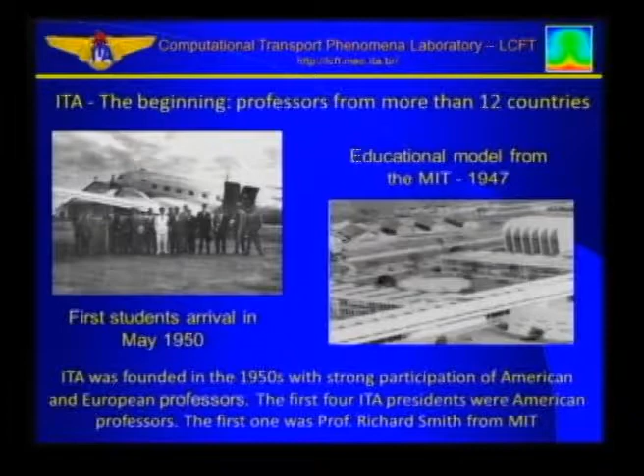So those are our first principals or rectors, if you will. And the first one was Professor Smith. Professor Smith at that time was the head of the aerostructural department at MIT. And the fifth one, this fellow, Johannes Meyer, if I'm not wrong, he was of Dutch origin. He immigrated to the US after the First War. And Professor Cecchini was the first Brazilian to become a rector of ITA, and he was actually born in France. So he's 90, and he was awarded an emeritus professorship status just a couple of weeks back. So this is our history.

And so ITA provided the conditions for establishing Embraer late in the 60s. Embraer is the Brazilian aircraft company. And over the last 30 years or so, Embraer has become the third largest commercial aircraft manufacturer. We're talking about mid-size aircraft, 100-seat class. So the other manufacturers are Boeing, Airbus, and Bombardier. Actually surpassed Bombardier. We are the third now. So our biggest competitors are the Canadians, actually. We don't compete with Boeing or Airbus.

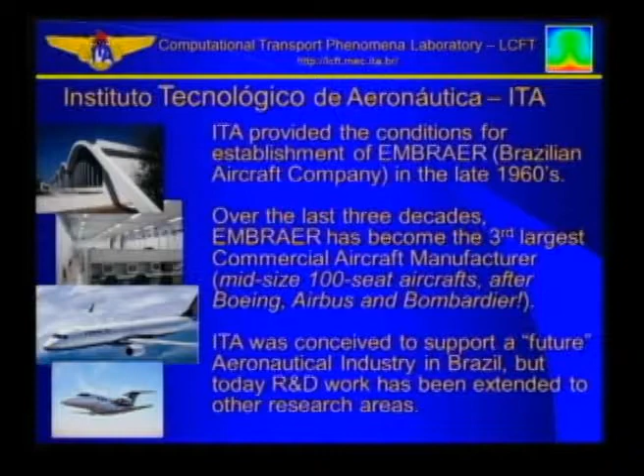And this is actually our new lab. I have a folder at the entrance there. So this was a gift of our beloved Petrobras. Gave us a new building, and the building is nearly ready. We have a 65-seat auditorium, and I would like to make that available to the Brazilian chapter. So we can have maybe in the future. The building is not ready yet, but we are almost there. So whenever you folks are in São Paulo, we'll be delighted to have you visit.

So the lab, what's called the Computational Transport Phenomena Lab, this is linked to the Department of Energy. I'm now serving as the head of the Department of Energy. So we started activities in 95, we became official in 99, and our mission statement is to support computational activities needed for R&D projects involving numerical solution of heat and mass transfer. So this is our mission statement.

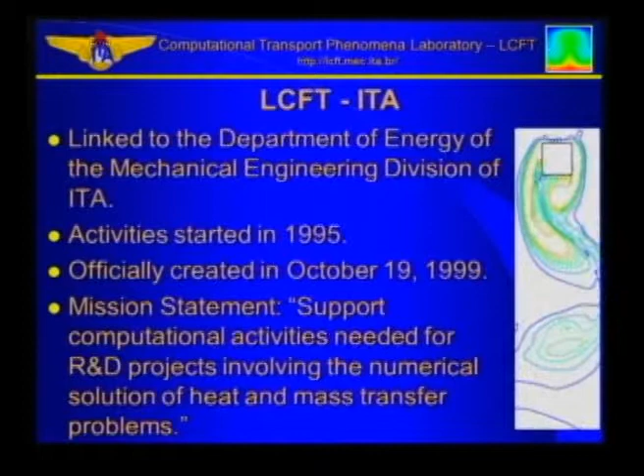So, talking about mathematical modeling of flow and heat transfer in porous media, we're going to talk a little bit about the applications for that, modeling, the microscopic computation, macroscopic computation, model, and some results. Hybrid systems: we're talking about a finite porous medium, something that ends, and then there is a clear flow, right?

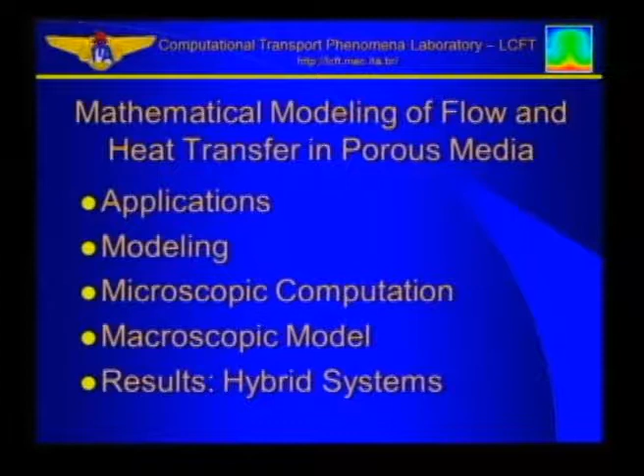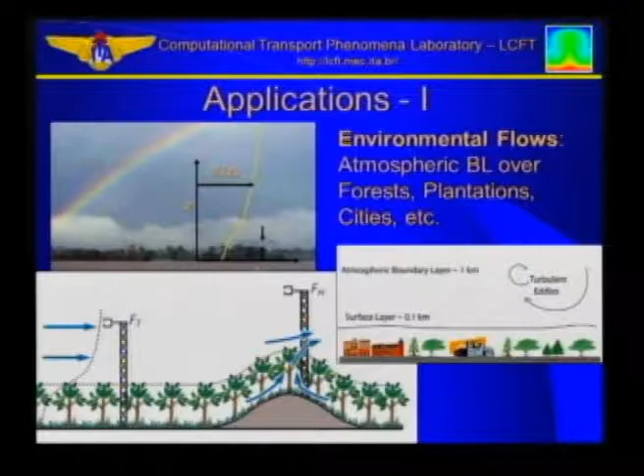So, environmental flows. The kind of porous media that we're talking about is not actually flow in rocks or sand or something like that. This is the Amazon River and the Amazon jungle right there. You see we can have an atmospheric boundary layer, and through the forest we can have what we call a permeable structure. So flow through vegetation and trees, and flow over populated areas where you have buildings, trees, whatever. Mathematically speaking, if you look from far from the site, that can be seen as a permeable structure.

As far as engineering applications, engineering flow is of some concern. So we have a gasifier here. In a gasifier, usually you have pellets of something, or coal. In our case, in Brazil, biomass, for example. So you have gas going in one direction and the pellets coming in the other direction.

And here's a reactor for producing hydrogen-rich gases, if you will. If you have a rich mixture coming in, you can have a partial oxidation followed by a thermal reformation. So you get a hydrogen-rich stream, and this is a porous structure. So this is a way of producing hydrogen. And this is a porous combustor that has been used for household heating, actually. So we're going to be talking a little bit about applications on those particular equipment.

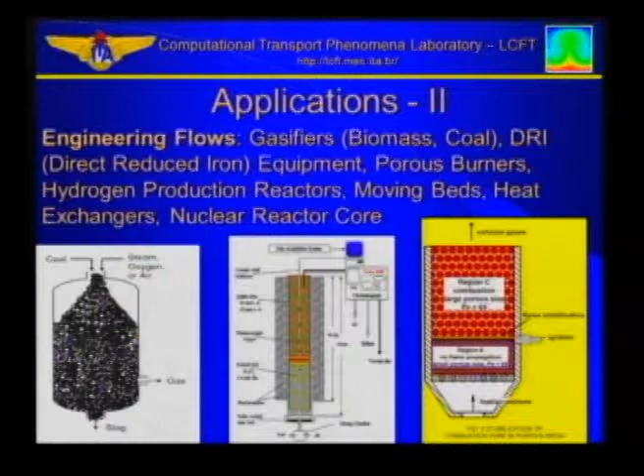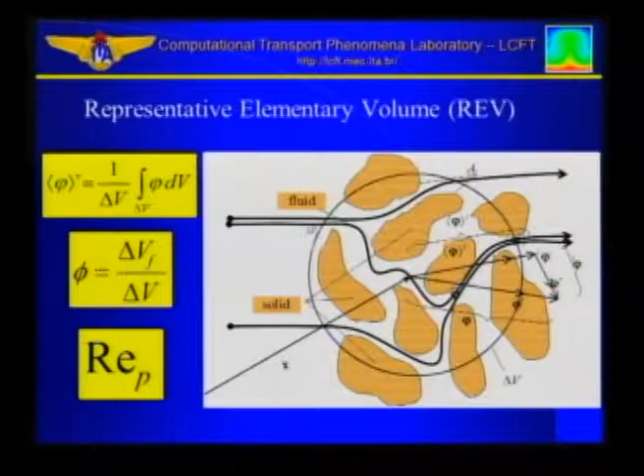So when we talk about flow in porous media, we have a solid phase distributed somehow, and in between these solid particles we have void space. So we can have volume averages that are defined like this, and the porosity, which is defined as the ratio of the void space to the total volume. So the very first thing is to establish some volume over which we're going to make an average. And we can also have a characteristic number, which is the Reynolds number, based on the statistical value of the pore.

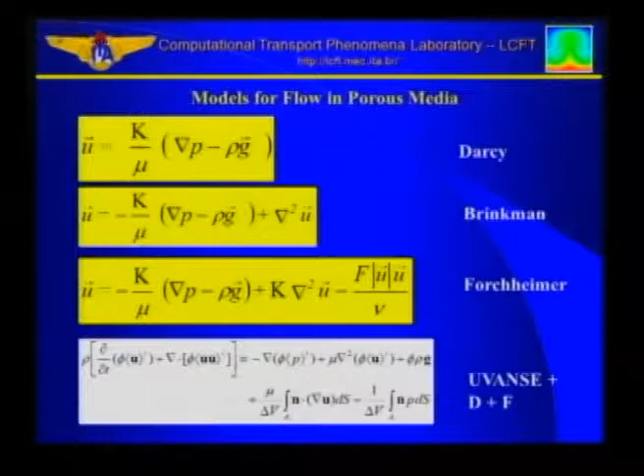So when a body of fluid goes through some solid material, the fluid feels two extra forces. The first one is due to viscosity, because the particles stick to the surface, and that depends on viscosity. This is this first term here. The second one is that the pressure field before and after the solid structure is different. There is a wake formed after passing the solid. So the difference in pressure gives rise to what we call the form drag or pressure drag. That depends on the pressure field surrounding the surface.

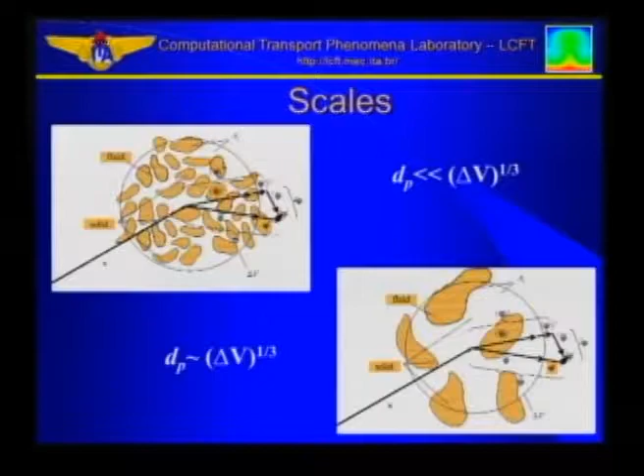So we have also a problem with scales, right? If the size of the voids is too small compared to the size of the solid, we will not have what we would call a turbulent flow. So we are talking about things like this, where the void is sufficiently large for having a turbulent flow inside this permeable structure. I prefer sometimes to call it a permeable structure, not a porous medium, because you think about sand or rock.

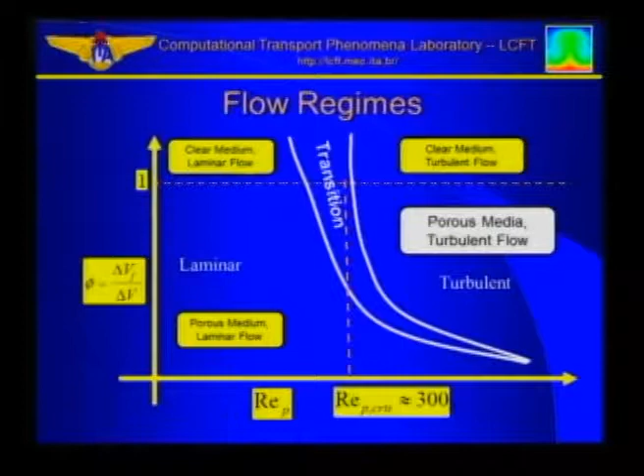So we knew two things. First, we have a solid phase distributed, so we need to do volume averaging. We have to apply to the instantaneous, local equations the volume average operator. And because things fluctuate in time, we have also to apply time average, the mathematical operator of time averaging, if you will.

And we start looking at the literature, and there was a huge debate in the literature, because some researchers would say that we have to first do time average and then volume average to get the right equations. Two groups were fighting against each other. One was a group led by Akira Nakayama, professor at Shizuoka University. The Japanese group said, well, we gotta do first time average, and then volume average to get the right equations. And then the American group, led by Professor Lage at the Southern Methodist University over in Dallas.

So the American group said, no way, you folks are all wrong, because you gotta do first volume, and then time average, and then you get the right thing. And the people would write nasty letters to the editors. And we look at that, and then the Brazilians came around.

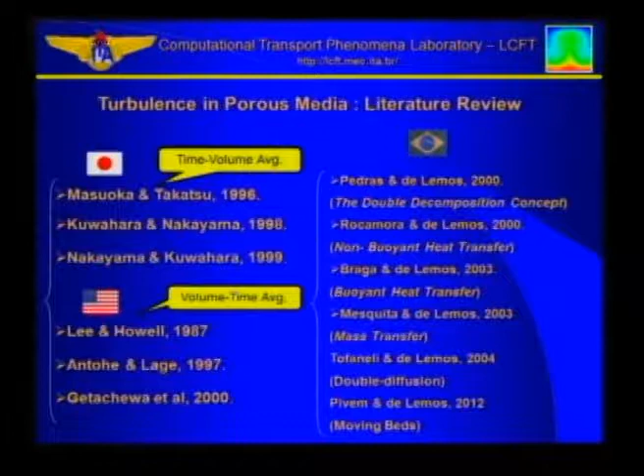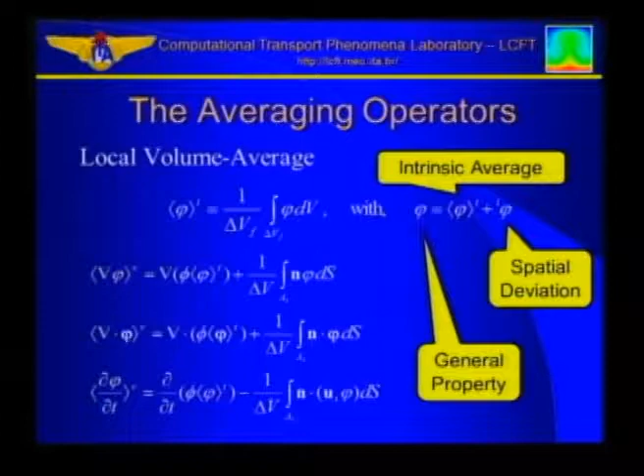So going over the operators, we all know what's a volume average operator. So a volume average is defined like this. So the gradient, the divergence, and the time rate, these entities can be volume averaged, and this is the result, so you all know that. So any quantity can be split into a volume average and a spatial deviation. Spatial deviation is the difference between the local value and the volume average, right? So this is the standard definition of volume averaging.

And then we decide to look at time average. Well, time average is defined like this. So we are talking about things that fluctuate in time. Any quantity can be split into a time average and a fluctuation. And these two operators, they commute. So the time average of the volume average is the volume average of the time average if the two domains of integration, space and time, do not depend on each other. So if we're talking about shrinking or swelling, or vibrating, forget about this. Then you have porosity depending on time. So everything that is written in here is for having an independence of integration domains.

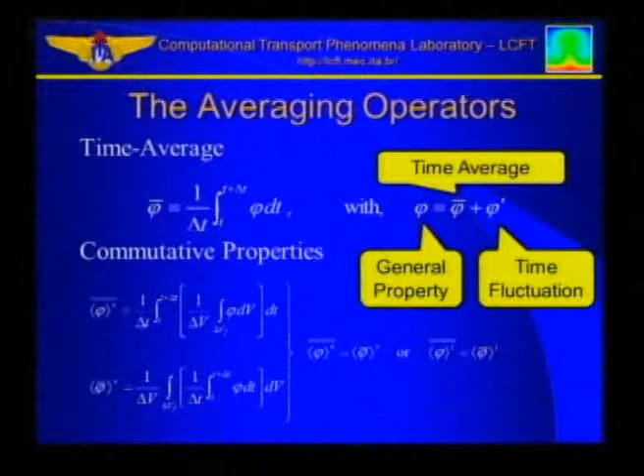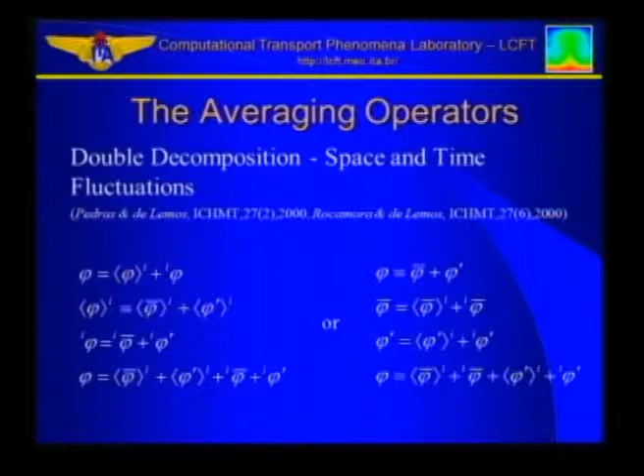So what we proposed back in the early 2000s was to do the following. We start with a standard volume decomposition, and we took each one of those parts and split in time, decomposing in time, if you will. So we end up actually with 4 guys instead of 2. And if we start first with time decomposition, and we split each one of those 2 guys into volume average and deviation, we also end up with 4 guys. So instead of splitting in 2 doing volume average, and in 2 doing time average, we split them in 4. And they have equivalences. And here is the concept.

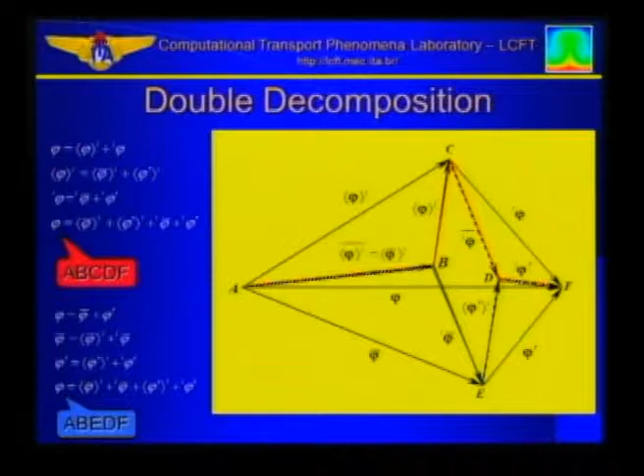And we have an equivalence here. As you can see right here, time average of volume average is volume average of time average. And here you see lines B, C, for example. The fluctuation of volume average is the same as the volume average of the fluctuation. This picture gives us this idea. And you see this line, CD is equal to BE. That means the time average of the deviation is equal to the deviation of time average. So with those equivalences, using this mathematical framework, we decided to go back and rewrite the equations and to see what the Americans and the Japanese were fighting about.

So we started with this, the local instantaneous momentum equation. We applied first order: we decided to go time first, followed by volume. So we apply the standard time average, and we get the Reynolds stress tensor, which is usually obtained in turbulence modeling.

And then we volume average this equation, so this is the volume averaged, Reynolds averaged Navier-Stokes equation. We end up with two extra terms: two extra drags, and something we call a macroscopic Reynolds stress, because now we're talking about a volume.

And then we decided to go back and reverse the order. Let's do volume average first. So we started again from the instantaneous momentum equation, did volume average, and ended up with this equation, the volume average equation.

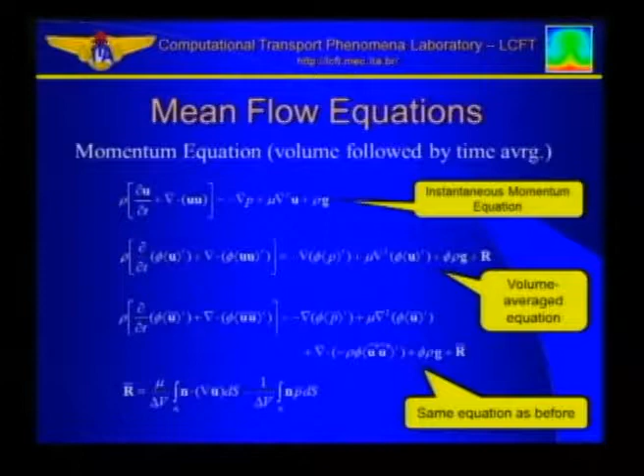And then we time average, and end up with the very same equation. So we said, what the heck, it doesn't matter which order you use, you get the same equation. Why are these people fighting?

So then we look at the convection term. In the convection term there is a dyad here, velocity times velocity. Because we can now split each of these vectors into four parts, the time average of the volume average of this ends up being four terms instead of only two. Here we have what we call dispersion, a macroscopic Reynolds stress, standard convection, and an additional term.

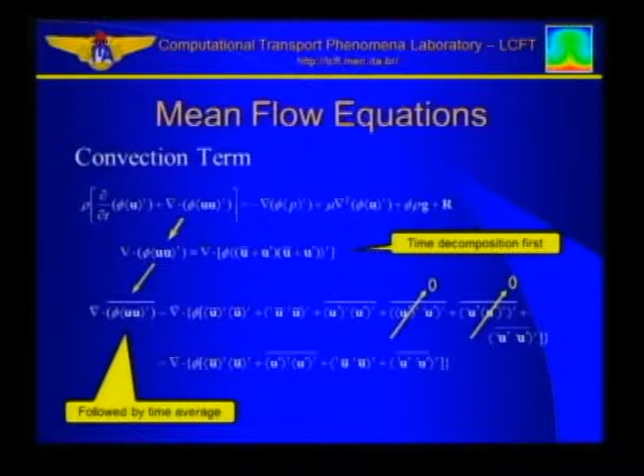So our convection term, splitting into four using the two operators in this mathematical framework, ends up composed by four entities, if you will: a convective term of macroscopic mean velocity, and turbulent stresses, similar to standard turbulent flow.

Dispersion, what we call dispersion, is a correlation between deviations in our mathematical framework. So dispersion for us is a correlation between deviations. And then we end up with this fourth term that we call turbulent dispersion. So if the flow is turbulent, there is an extra term.

Usually, well, in laminar flow there's dispersion, right? In turbulent flow there's turbulent stresses. So in porous media flow, in turbulent flow in porous media, we have the so-called turbulent dispersion, or at least we were able to identify it.

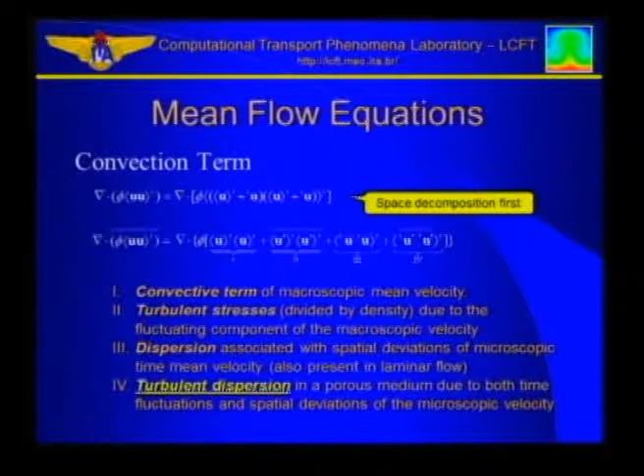So we decided to look at the way the turbulent kinetic energy was put together by the two groups, because in the mean equation, the momentum equation, we had no difference. So how do we form an equation for turbulent kinetic energy?

Well, first we have to have a transport equation for the time fluctuation, and you take the scalar product by the time fluctuation and time average. Then we end up with this term.

This is K. K, the turbulent kinetic energy, is already the outcome of a time averaging process, and we volume average it. So we end up with this term. This is the turbulent kinetic energy following time and then volume averaging.

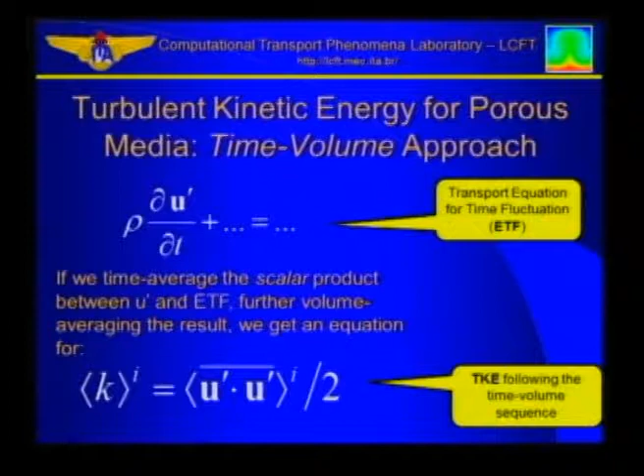And then we decided to go the other way around and take first the volume average and then the time average approach. So we start with the macroscopic transport equation for the fluctuation.

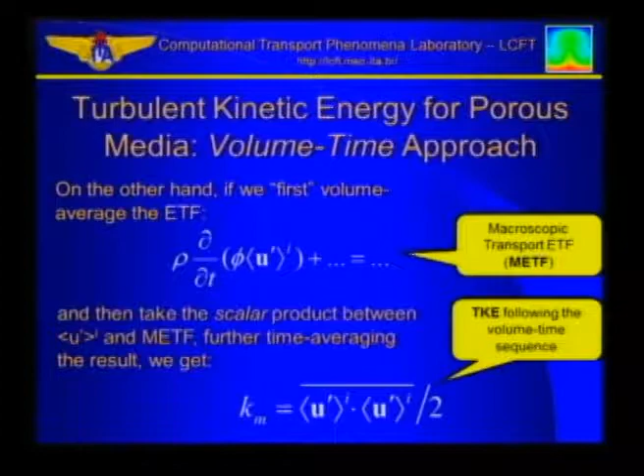So we volume average the fluctuation, and then to compose the turbulent kinetic energy we apply the scalar product: we multiply it by itself, by the volume average of U prime, and end up with this term. So this is another way of identifying turbulent kinetic energy with the flow.

And then we looked at the two ways and said, wow, bingo. This is where these two groups are different, or are doing something different. The Japanese were talking about the first one, and the Americans were talking about the second one, but they did not have the mathematical framework to explain the difference.

So there is an extra turbulent kinetic energy. If you double decompose, there is an extra term that we call the extra turbulent kinetic energy that differentiates the two. And then we published that in '99 and another paper in 2000.

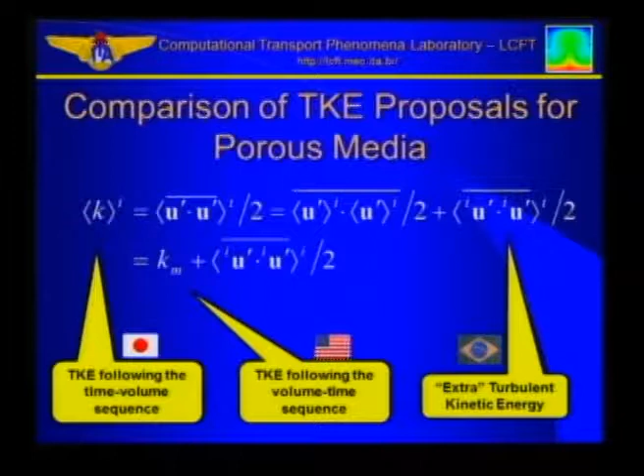So when you don't have the right notation or the right mathematical framework, you end up not finding things. It's interesting how notation plays a role in developing things. Because we had this notation, we put together this double decomposition, and we were able to find the difference between these two ways of viewing things.

And then we decided to establish a macroscopic model for turbulent flow in porous media. So we start with the standard k equation, turbulent kinetic energy, with volume average, and we included an extra term, a production term.

So when a flow comes and goes through some solid material, it gets perturbed. If the flow is laminar at first, it gets perturbed, and some of this mean mechanical energy is converted into turbulence.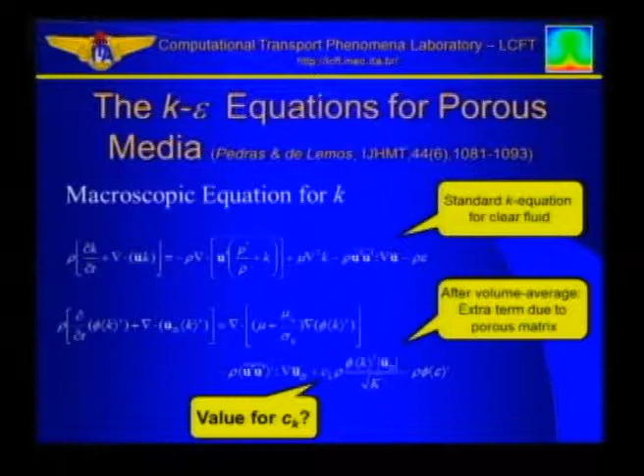So in our model, we included an extra term, and as all turbulence modelers do, we had an unknown constant to be determined. So what we did is, in the equilibrium situation where production equals dissipation, you can get an equation like this. And once you have the two sides of this equation, by integrating unit cells, you can determine this constant.

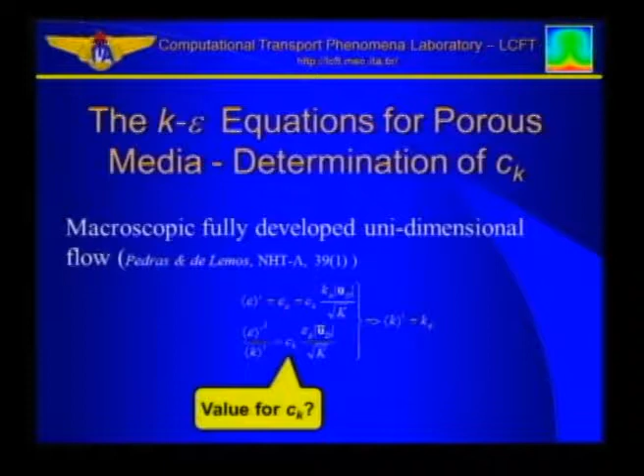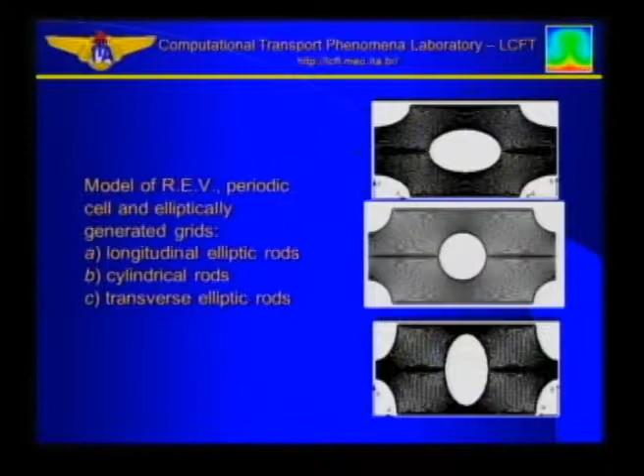So what we did is we assumed that our porous medium was made by an infinite number of those unit cells. They could be made out of elliptics, longitudinal ellipses, circular rods, and transversal ellipses. We also had some computations done by the Japanese group for square rods. So we computed the fine flow in here and integrated numerically, and put together a plot with the K values and the epsilon values, for a whole bunch of Reynolds numbers and geometries.

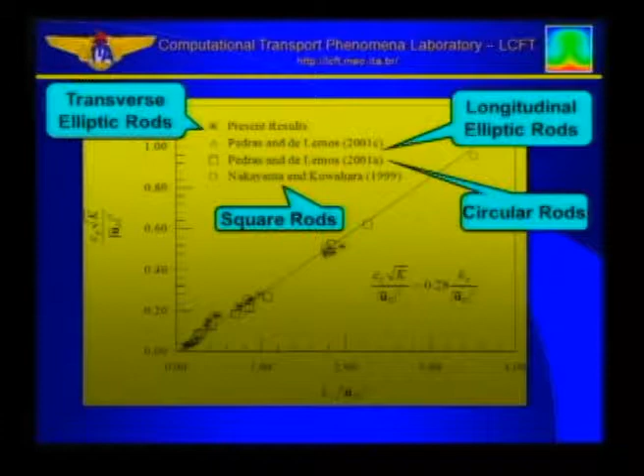We see that we can have a straight line here, and that straight line gives us a number of 0.28 for that unknown constant. So with that, we close our model, if you will. Regardless of the shape of the porous medium, regardless of the Reynolds number, we got one number for our constant. That was a nice indication that we are not all that wrong. I say we might be wrong, we're limited, but at least we got something that made sense.

Here's a plot that shows the value of turbulent kinetic energy related to the Reynolds number. The amount of turbulent kinetic energy that you have depends on the shape of the porous medium. So if we have more streamlined flows, those triangles are for the longitudinal ellipses, so the flow is more streamlined, you have less mechanical energy converted into turbulence. Those higher values here are for the transverse ellipses, where you have a huge wake behind the ellipses.

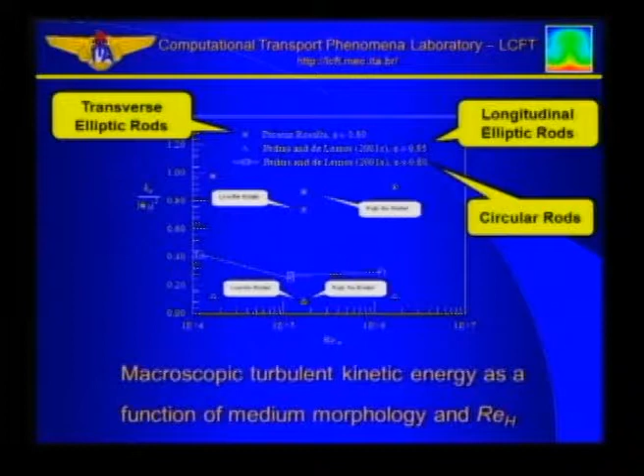So regardless of the geometry, we had something also that made sense. So we decided to rewrite all transport equations applying these two operators and see if we can get some meaningful results or some advantage.

So this is a plane channel flow with a sudden expansion. And if you have a plane channel flow with a sudden expansion, we have two large recirculating bubbles. Having large recirculating bubbles in a flow means that you are losing energy because you are transforming some mean mechanical energy into turbulence, and then you lose energy.

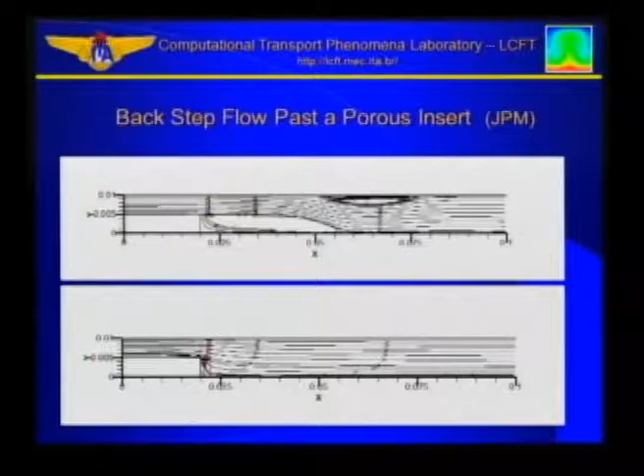So our idea was to see if, right after the expansion, we put some stuff in here with some porous material, what's going to happen? In doing this, we kill the recirculating bubbles. But you might say, well, you are including some sort of obstruction in the flow, some porous material there. Yes, but we lose in here and we get in there. So the net gain is advantageous.

The other thing that we did was we looked at the shell and tube heat exchangers. You might be aware of that. In shell and tube heat exchangers, we have baffles. The baffles push the flow up and down across the rods, right? We have one fluid come inside the tubes and the other one over the tube, over the shell.

So the idea was, those baffles are made of solid material. Our idea was, how about if instead of solid material, we had some sort of perforated plate, like a porous structure, so the flow can go through more easily? You don't exchange as much heat because the flow is not that much transverse to the tubes, but there is a net gain. We don't get as much heat exchange, but we pay much less pumping power. So there is a net gain on that.

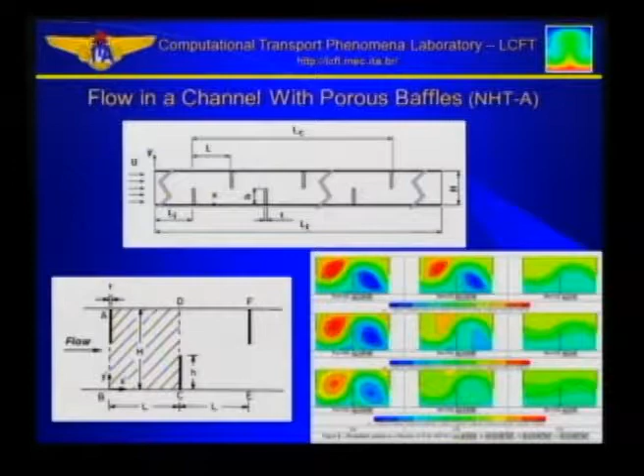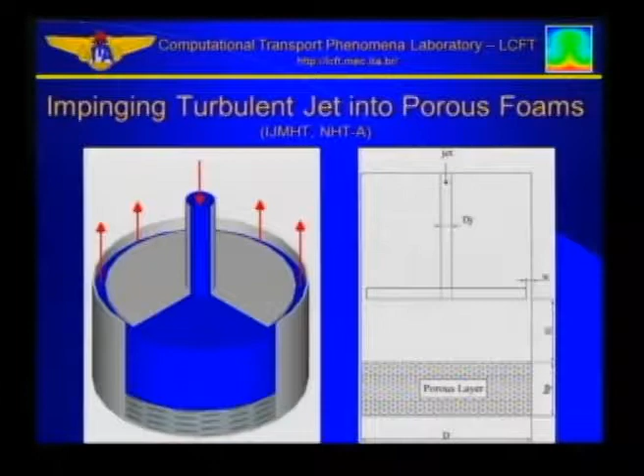The other thing we looked at geometry-wise is that we decided to study impinging jets into surfaces. There was a nice experimental measurement done in South Africa. The guys impinge some jet into a porous layer through a disk, and there was a clearance around where the flow could come up. So the idea is, if we apply this model, are we able to correctly simulate the flow inside this chamber? Those are the results.

Now we turn 90 degrees around, and the flow is coming horizontally. Those are the calculations done by the group at South Africa, those are ours, and those are measurements. The measurements are done only on the empty space, not inside the porous foam. They used laser Doppler velocimetry. You can see here that the center of the recirculating bubbles in our calculations are closer to the experimental work. That was a very nice indication.

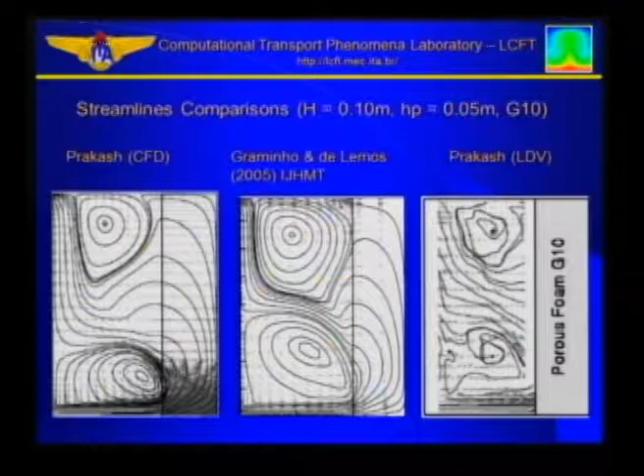So we move on and try to do some heat transfer, because we have many technological applications for that. Let's say we have a surface, and one application for an impinging jet is you want either to heat or cool that surface. So you have an impinging jet coming with temperature T0, and the plate has a temperature T1. They are different temperatures, and the question was...

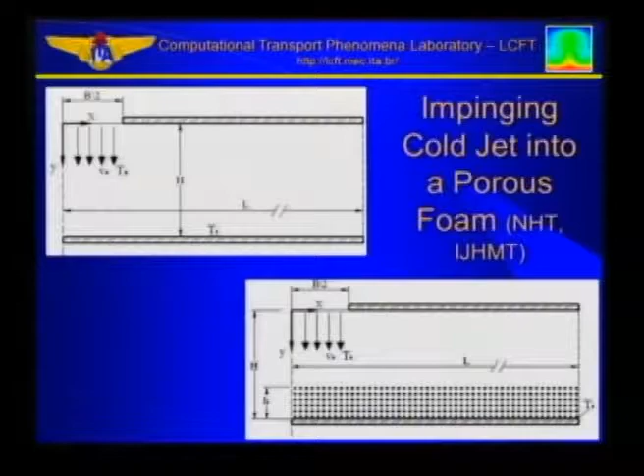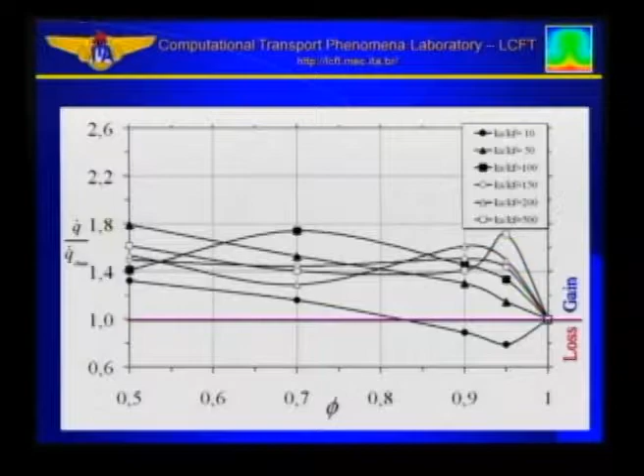If we covered the plate with some sort of porous structure, can we get more heat or less heat? If we can get more heat out of this surface, that's nice. So we did these calculations, and this is a plot of porosity of the layer against the ratio of Q dot with the porous layer to Q dot clean, without the porous layer. Whenever this ratio is higher than 1, it's a good idea to cover that plate with a porous structure, because we actually increase the heat transfer area. So at the end, you do that.

And then we decided to include some chemical reaction to calculate our porous burners. This is a silicon carbide sort of material, and this is a flame inside the silicon carbide. You pump in a mixture of methane and air, or some hydrocarbon, and ignite it. Instead of a free flame like in an oven or a candle, we have a flame that is inside this material, and because it's inside, it heats up the solid part.

So here we have the gas temperature coming in, and here we have combustion. The temperature of the gas goes up. But because this is inside a solid material, heat flows back by conduction, and here's the solid temperature, which is higher than the gas temperature. So it heats up the gas. Heat is recirculating, so the average temperature is higher, and you use less fuel to produce the same power. So there is a regenerative sort of effect.

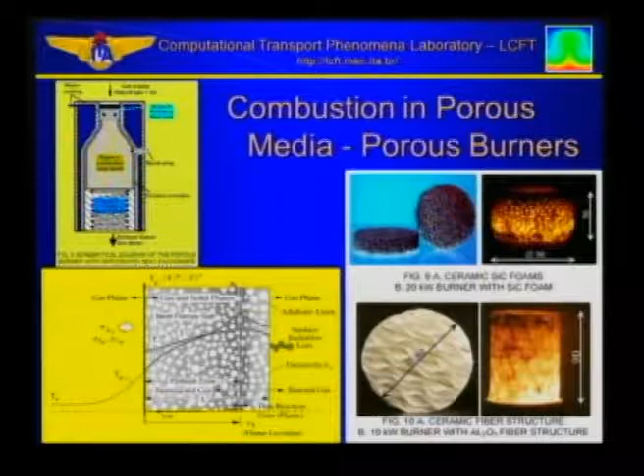So those are burners, commercial burners that have been used for household applications and also for drying in the paper and pulp industry.

We did some calculations using the one equation model I spoke about yesterday. In this situation, we have only one energy equation, which assumes the average temperature for the solid and the gas is the same. As we pump in more air, we increase the incoming velocity. This is the flame front, and the flame front pushes forward and opens up, and at the center here we have unburned gas coming out, for example.

Down here we have one-dimensional calculations compared with experiment. The blue lines are experimental measurements. Here we use the two energy equation model, with one energy equation for the gas and one for the solid. You can see here that the temperature of the gas at the flame front is higher than the temperature of the solid, as expected.

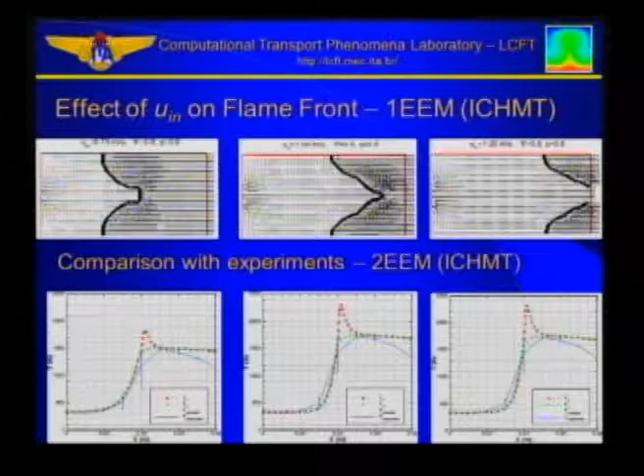In industrial applications like this, as opposed to maybe in situ combustion, it may not make much difference, but in other situations it does make a difference. The reason we did not get this reduction in temperature here is because we did not have the appropriate boundary condition when we did those calculations — you have to include a radiation boundary condition at the exit of the burner, accounting for radiation to the environment.

So we have more recent calculations that show that effect. And then we moved on to calculate things when the solid matrix moves in relation to the fluid.

Applications for that are gasifiers. Here we have a solid velocity and the Darcy velocity. Remember the Darcy velocity has two adornments: the subscript D means it's a Darcy velocity, we took the volume average, and the bar means it's a time average.

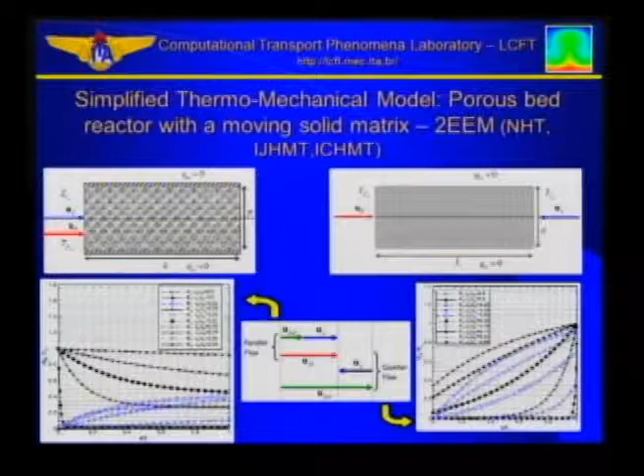In this case, we assume the solid moves at constant speed. You can have two situations: they can either move in the same direction, or in the opposite direction as in gasifiers, for example. We always have a relative velocity — the relative velocity for counterflow is larger than for parallel flow. We got these temperature profiles for both phases, solid and fluid, and they follow the expected behavior.

And that's it, I guess that covers a little bit of what we have done.